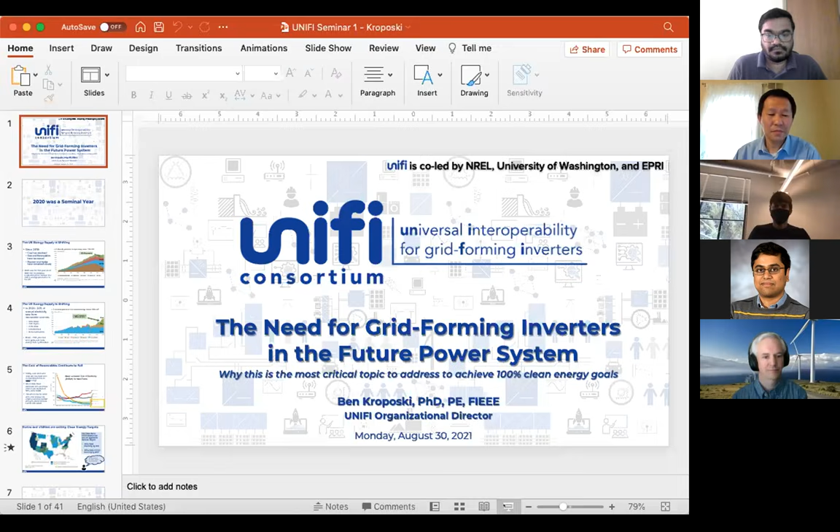My name is Ben Kroposki, and I am serving as the Organizational Director for the Universal Interoperability for Grid Forming Inverters, or as we like to say, UNIFI Consortium. I'm going to be talking today about the need for grid forming inverters in the future power system, and specifically why this is the most critical topic we need to address to achieve 100% clean energy goals.

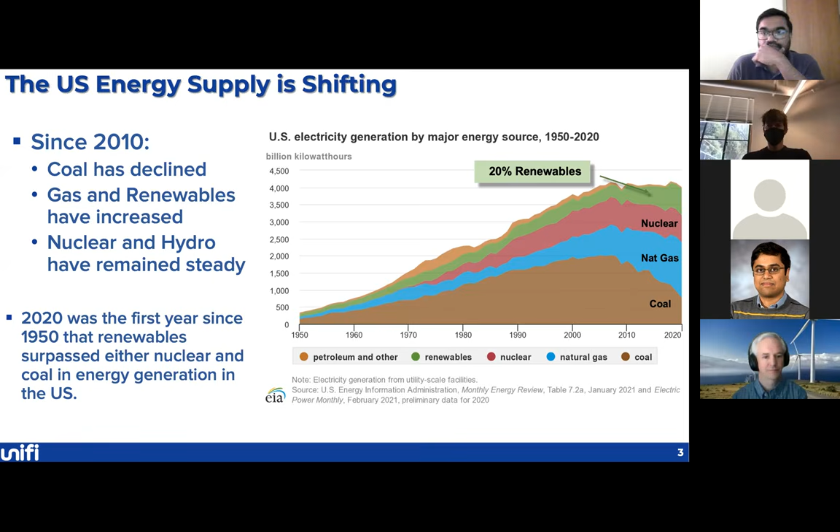So 2020, which was last year, was a seminal year. A lot of important things happened, and let me just touch on some of these critical things. First, the entire supply of energy in the United States is shifting. Over the last decade, we've seen a dramatic decrease in the use of coal, whereas natural gas and renewables have increased and nuclear and hydro have remained steady. But 2020 was the first year, at least on this graph, that renewables surpassed either nuclear or coal in energy generation in the US. So with a 20% energy share, that's a significant achievement where it finally passed coal and nuclear in energy generation.

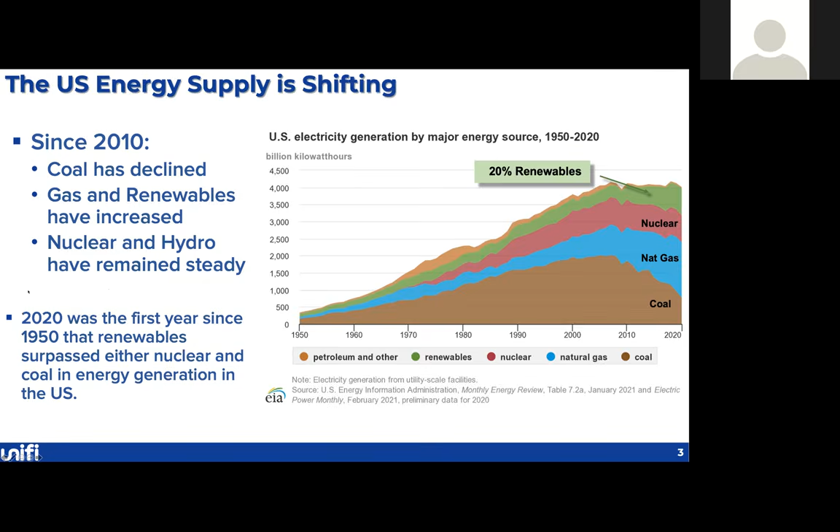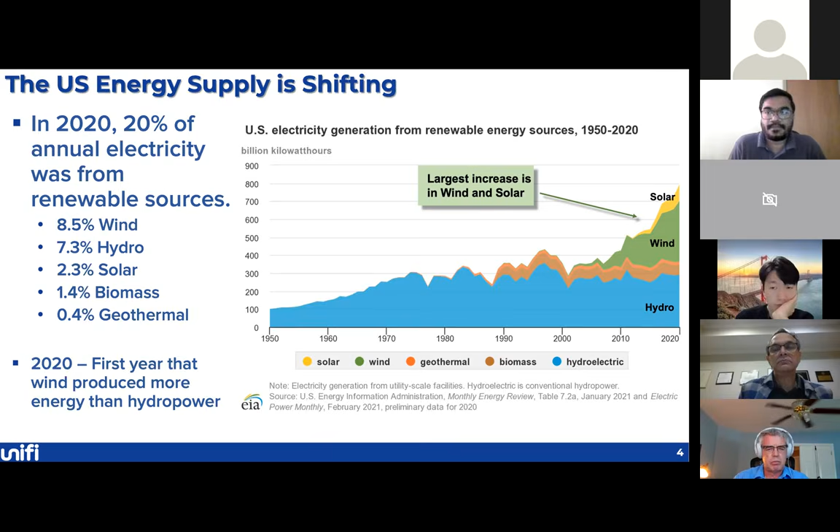So if we take a look at that and we say, why is this really happening, that renewables are starting to take off? We've been working on renewables for 30 plus years, trying to make them cost competitive. But really, finally, if you look down into the 2019, 2020 area, this is when utility scale wind and utility scale solar have become the most cost competitive forms of new energy. Now, this is across the entire United States, and depending on what region you're in, it's going to vary. But in general, we've seen these tremendous decreases, 70% in wind, 90% in solar over the last decade.

And although this is the levelized cost of electricity for new plants, and that's why a lot of new plants going in are either wind, solar, or natural gas, these prices are so low that they are actually rivaling the cost of electricity from existing nuclear and gas plants, and in a lot of cases around the country are below actual operating costs for existing coal plants. This is just a huge change in the industry. And we are going to see this continue for the next decade plus, where wind and solar are going to be increasingly used because they are the lowest cost form of new electricity.

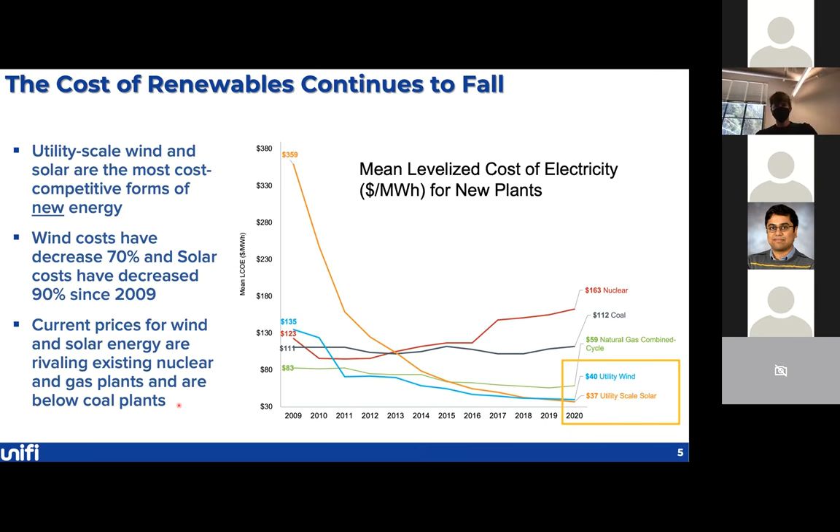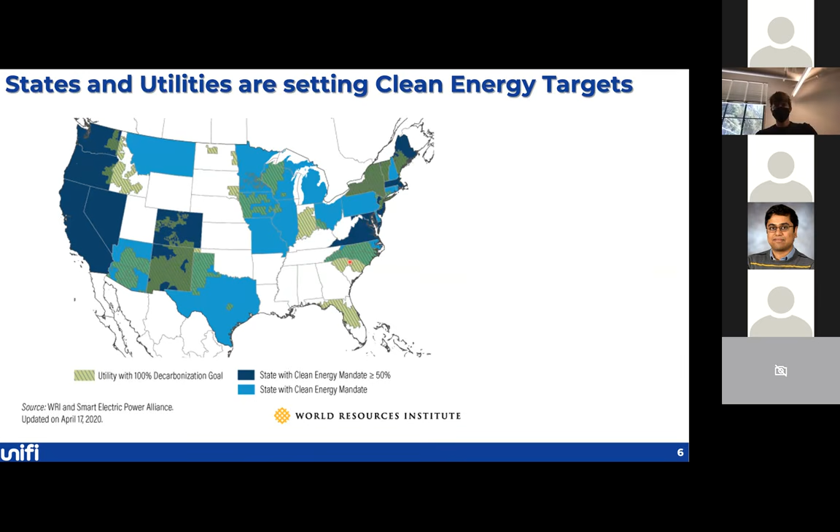So what's really driving this besides the economics? Economics is always going to be the main driver of practically everything that we do, but we're also seeing states and utilities across the United States put together clean energy targets. You can see from this graph quite a number of states that have state clean energy mandates over 50%, several that are 100% clean energy. And these green shaded areas are utility service territories. So you have places like Xcel Energy here in the Midwest, and Duke Energy in the Carolinas, where the individual utilities are setting these 100% decarbonization goals. A combination of these has really led to a push in clean energy technologies.

Now, in addition to that, we have finally seen the new administration come up with these clean energy targets: 100% clean electricity by 2035 and a 100% clean energy economy by 2050. And the engineer in me is sitting there thinking, what do these goals really mean? How aggressive are they?

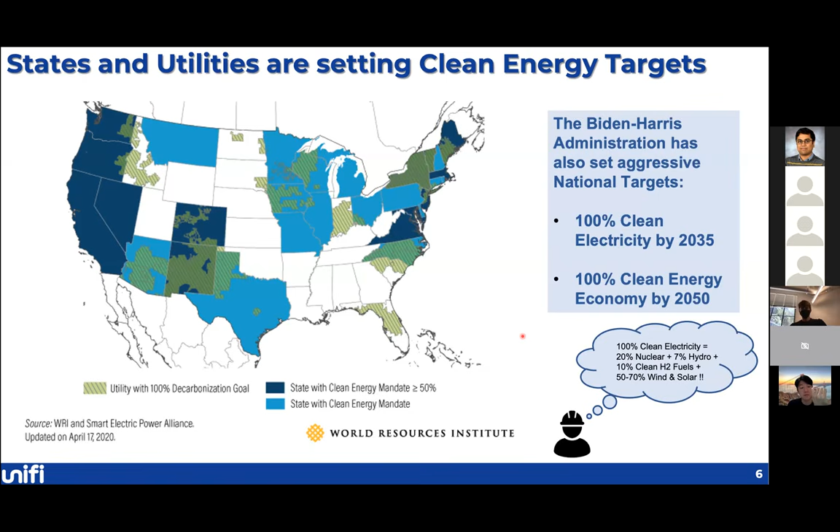If you take a little thought experiment and say 100% clean electricity by 2035, and we have 20% nuclear, 7% hydro, maybe 10% clean hydrogen fuels of some sort in the future, that still leaves 50 to 70% that is going to have to be made up from wind and solar technologies. And this is a really big number. So let's remember that 50 to 70% of the entire system has to be made of wind and solar. So what do we need to do to get there?

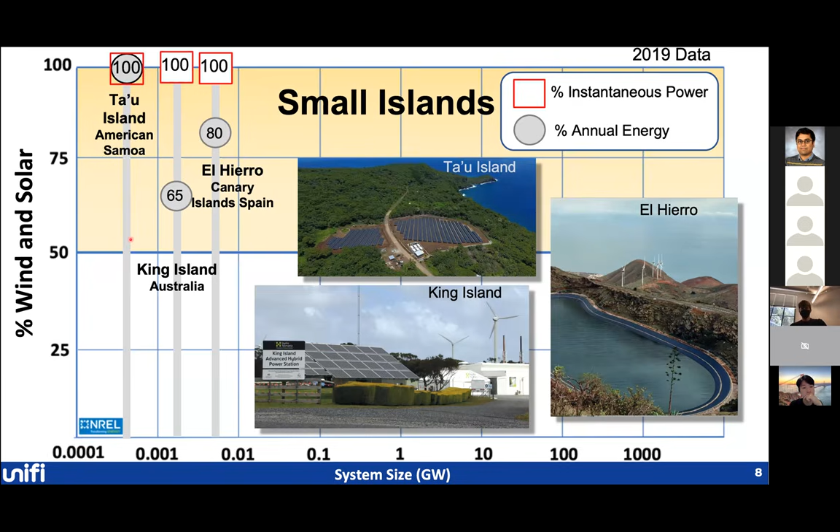As we go to larger scale systems, you can see here on large islands, and here some good examples would be Kauai in the Hawaiian Islands, Maui in Hawaii, Crete in Greece, and the country of Ireland, the entire Irish power system. As you can see here, we get fairly high annual levels, somewhere in the 30 to 40% range, and we're incrementally increasing the instantaneous level of these grid forming sources. You can see 90% to 60%.

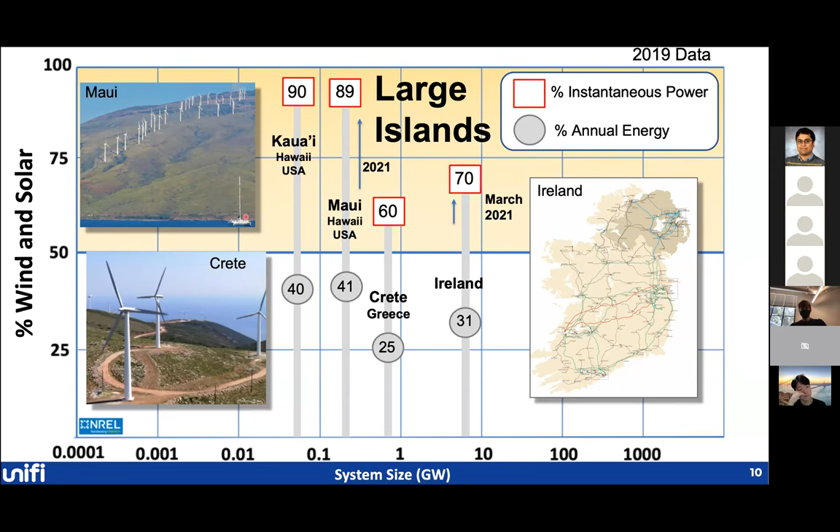In fact, this data is from 2019, and even since then, we've seen increases in these levels. As you can see here, Maui was just, as of this year, able to get up closer to 90%, and Ireland also got up around 70% on an instantaneous level. But you can see we're still, even as we get larger and larger systems, not getting really to 100%. And there's a variety of technical reasons for this that we'll be going through in this presentation.

Now, as we go to larger interconnects, I picked two examples here, ERCOT, which is the Texas power system, and the Western Interconnect of the United States. As you can see here, these levels range from 10 to 26% annually, and then 24 to 58% on an instantaneous level, although this is older data too, and since even this year, ERCOT was up around 66% instantaneously.

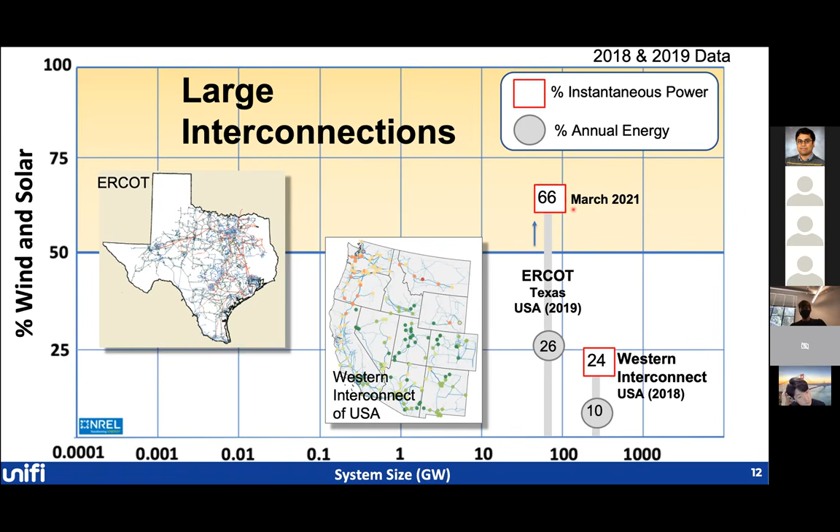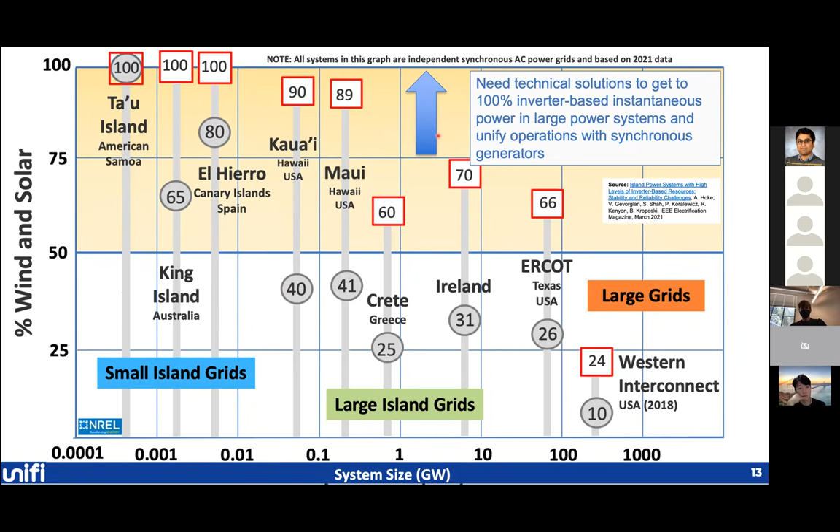But at the end of the day, what we need to be able to do is look at these large-scale systems, figure out the technical constraints, and get them to operate as if they were some of these smaller-scale island power systems. Now, this is a non-trivial problem to solve, but what we want to be able to do is come up with technical solutions to get us to 100% inverter-based on an instantaneous level with really large power systems. And to do this, we need to really unify the operations of inverter-based systems and synchronous generators.

So let's do a quick analysis, just kind of a thought study here, back of the envelope calculation, just to see why getting to 100% is so important.

So let's do a little quick case study. This is using some data from EirGrid, which is the utility operator on the Irish power system. Again, if you look at their 2018 data, which is what we're going to look at, they were up running around 65% instantaneously, which again, this is actually limited by the system operator, which got them to around 30% on an annual energy basis. But by 2030, they want to be getting up to 70% on an annual energy basis

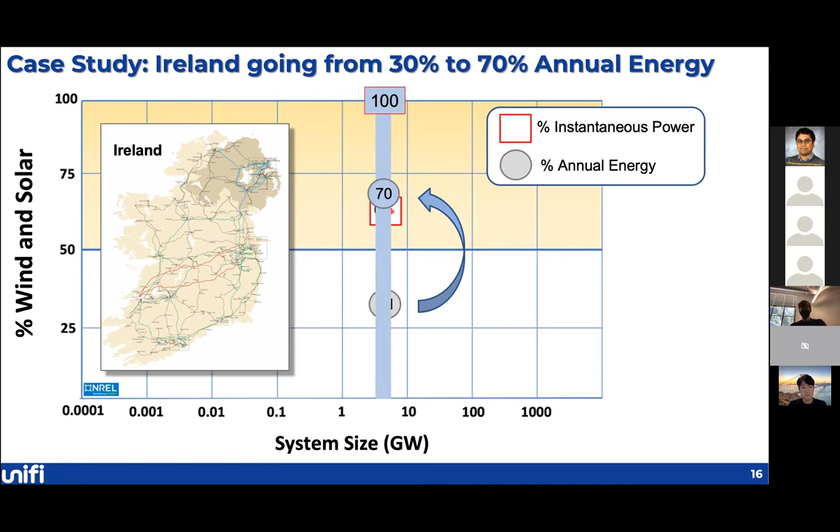and 100% instantaneously. And why 70%? Well, that's on your way to 100% clean energy system. And if you remember from an earlier slide, for the United States, probably up where we need to be in the 2035 time period. So let's just take a quick look at this example to understand why getting to 100% is important. What you see here is the wind data from 2018 in the Irish power system.

And you can see they're limiting this level of wind on the particular system to 65%. This is actually limited by the system operator themselves. But you can see that for the most part, the wind is going up and down crazy throughout the year, going from January to December.

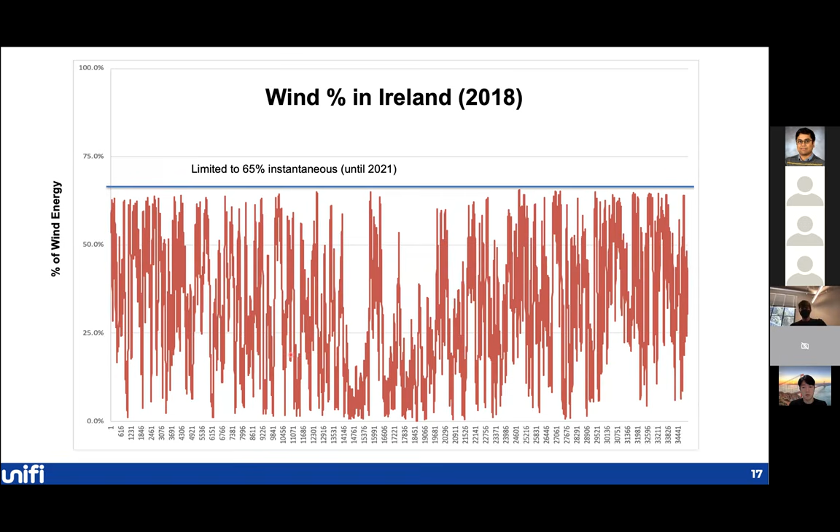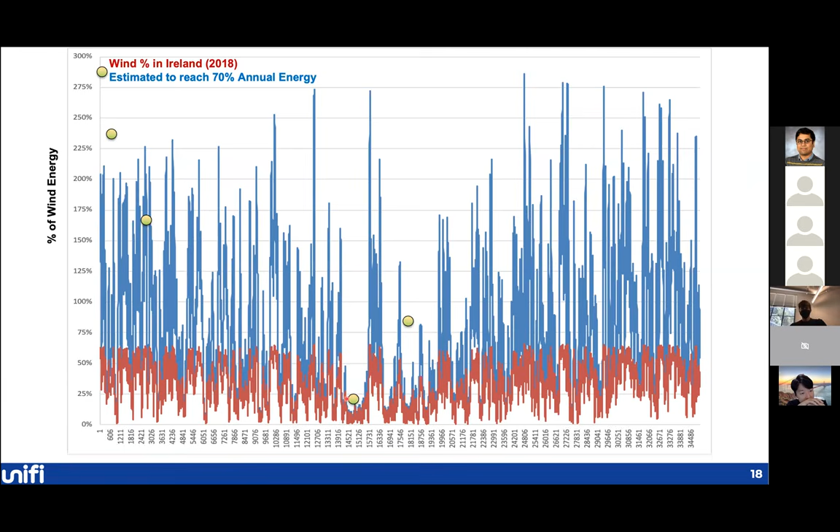Now this graph is pretty crazy to look at, so let's reorganize this data a little bit to make it a little simpler. What we're going to do is create something similar to what especially people in the power system know as a load duration curve, but we're going to create a variable renewable duration curve. So we're going to resort this data from high to low as such. We're going to slowly move all the data around, and then we create this curve, right? We've resorted all these blue data points into this curve, which is called a variable renewable duration curve, but it really quickly helps you understand some important parts of the system.

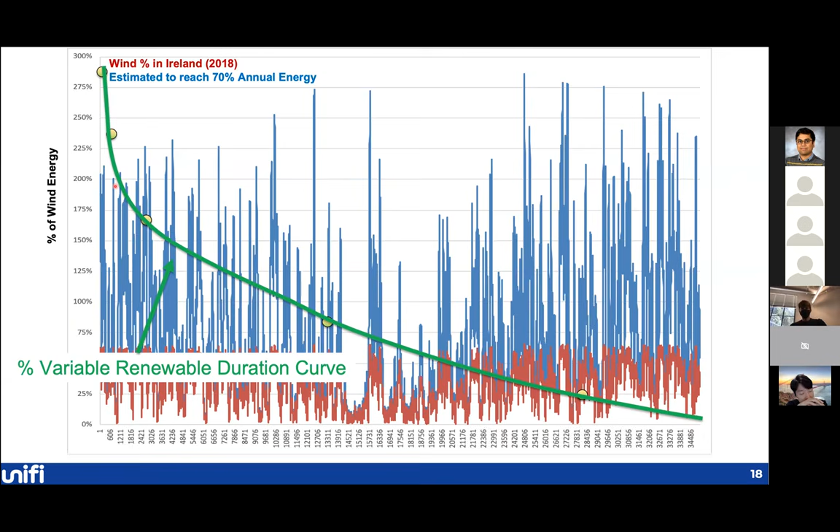So now what I've done is I've transposed that 70% renewable duration curve on here, and then the 30% or 29% duration curve. And if you take a look at this, some important things come across. First off, this amount of energy is provided by wind, which is 30% of the area under this flat line. And the rest of this has got to be provided by other sources, whether it's coal or natural gas or whatever resources you have available. But at the same time, you can't go over 65%. So you're having to basically curtail all of this electricity here.

Now, if all of a sudden we were able to install up to 70% wind, we wouldn't magically get that much energy, because if, for example, we're still limiting the instantaneous level to 65%, we would only pick up this amount of the curve here. And so now instead of 30%, we actually get up to around 45% on an annual basis. And still you need other sources to provide the rest of that energy. And we had to curtail all of this wind here.

Now, if we think about what we really want to be able to do, what we want to be able to do is come up with some type of technical solution to get us to 100%, because all of a sudden that frees up a really big chunk of this annual energy that we're currently curtailing. So if all of a sudden we were able to go to 100%, instead of 45%, we're now up to 58%, and that's getting us a lot closer to this 50 to 70% overall need on the system.

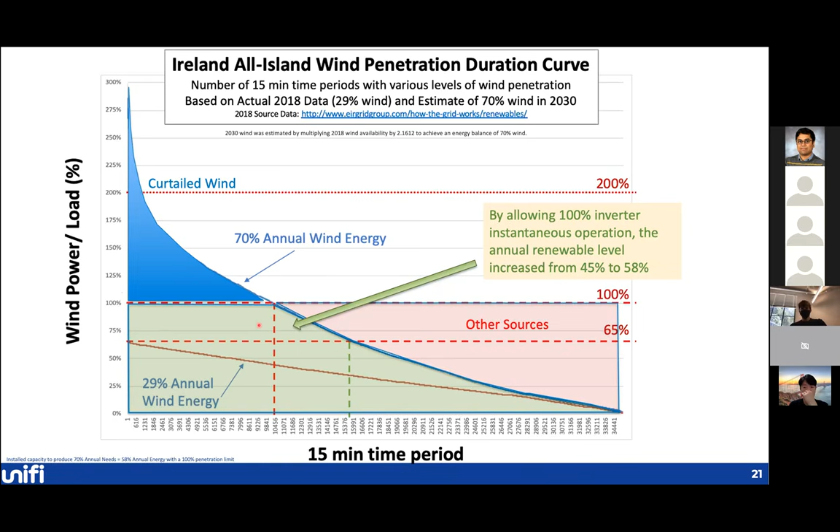Now, of course, I'm just doing it for Ireland here, but if you do this for any particular system, you will get something similar to this, where going to 100% instantaneously will allow you to pick up the most cost-effective portion of electricity. Now you can see we're still curtailing a lot of electricity in this scenario, but at the end of the day, that has to be solved with things like energy storage, increased transmission, or demand response or moving load.

But the biggest and cheapest and quickest way to access the most renewable energy will be through getting this to 100% instantaneous levels of inverter-based resources. And that's really why I'm saying that this is the most critical problem to work on in the short term. Longer term, we're going to have to solve all these additional problems to get and move this excess energy over into this portion here and reduce our dependency on other sources.

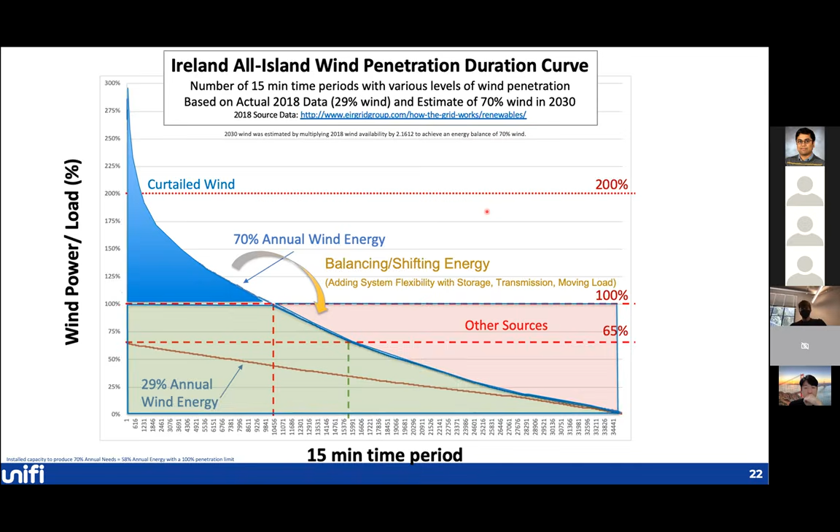Okay, so that kind of explains why we want to try to get to 100% and why that's so critically important. If we take a look at inverters and machines together, let's understand why this is a challenge and what we need to address. So if we take a look at currently operating large-scale power systems, for the most part, they're based on synchronous generator technology. So whether it's hydropower, coal, nuclear, natural gas, all of these have a synchronous generator inside of them.

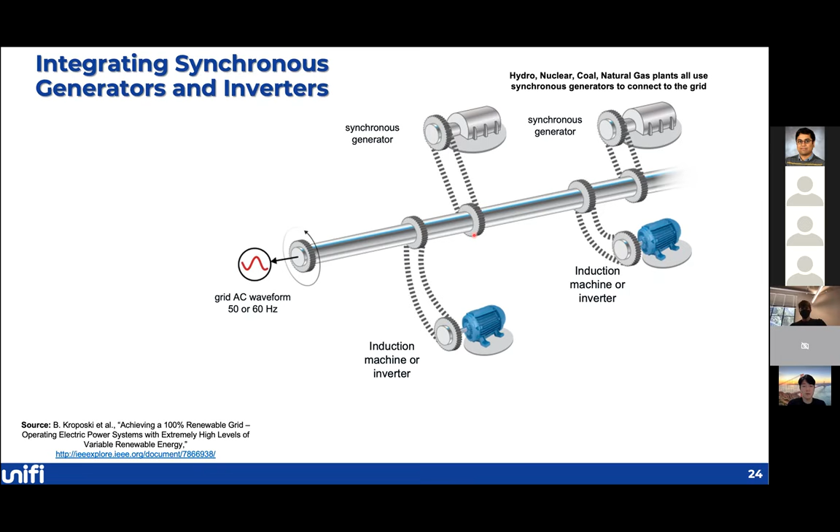And when we electrically connect them together, so you can imagine this being a transmission line connecting two generators together, we create a large virtual power machine that is all synchronized together and outputting an AC waveform, whether that's at 50 hertz like in Europe or 60 hertz in the United States. When you connect induction machines or inverter-based technology, they don't necessarily have a physical connection that is created by these synchronous generators. So you have a somewhat looser connection, if you will.

But what we need to do in the future is, as we develop PV and wind technologies and inverters, that they sort of replicate what's going on in synchronous generators, although they don't have all the physical characteristics. But if we can come up with sort of rules of the road on how to unify the operations of synchronous generators and other synchronous machines and inverter-based resources at any scale, that will enable us to either run at 100% inverters, 100% synchronous generators, or everywhere in between, which is what we're going to need in future power systems with wind and solar resources varying throughout the day.

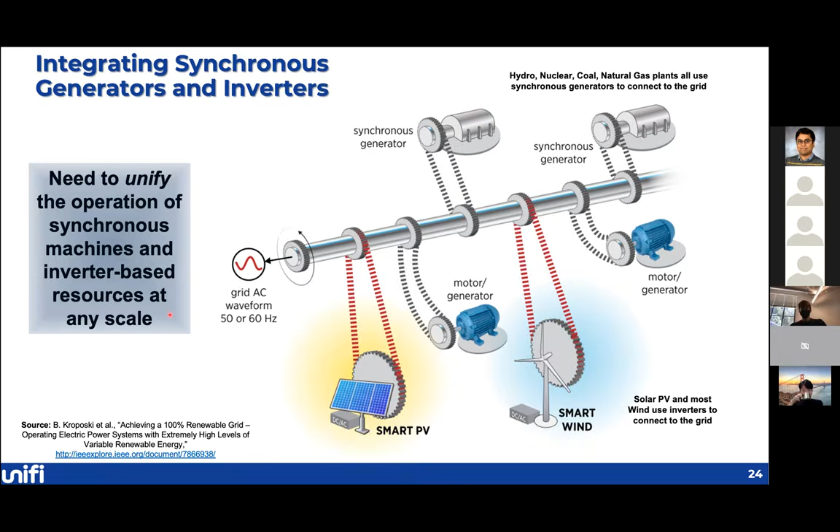There are a variety of technical challenges with inverter-based technologies, and this particular consortium is going to focus on trying to address a lot of these. I'll highlight them here, even though I won't go into massive amounts of detail. We'll be doing those in future parts of this seminar series. But if you think about the system, we always need to be able to maintain frequency stability and voltage stability. So those will be critical aspects.

Now, we can do that actually currently with grid following inverter technology by adjusting the control algorithms in there to have what we call fast frequency response characteristics that would emulate some of the inertial characteristics you would see in synchronous generators. But there's additional considerations that need to be taken into account. Things like system protection. So I often use this graph as a way to just quickly understand why system protection is so important and what inverters bring into a system and why it's a challenge.

If you take a look at this graph here, what we're assuming is that a fault happens on this system at basically time 0. And when a fault happens on a grid with a synchronous generator, you get some output characteristic of the current that looks like this. So it's maybe 6 times rated output current for several cycles as it decays. But this huge spike in current very quickly allows protective relaying devices or fuses to recognize a fault has occurred and operate properly in order to isolate that part of the system.

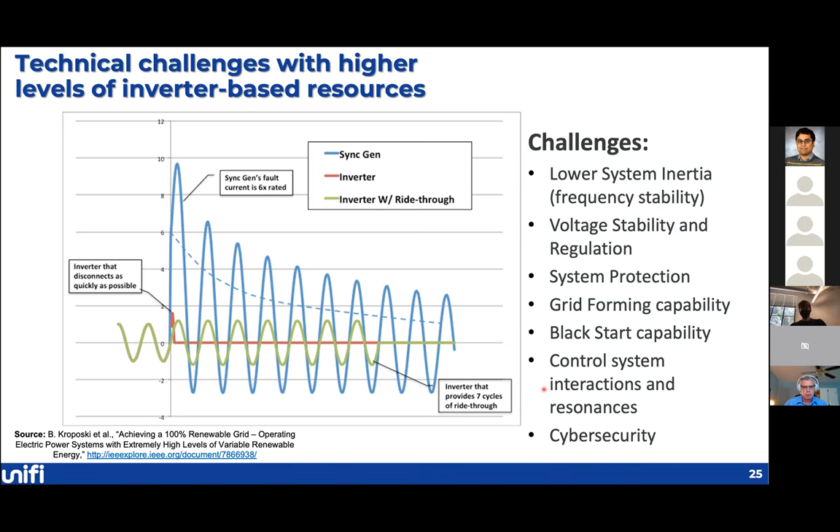There's additional issues around the various control systems that get implemented in inverters and potentially interactions with those, as well as cybersecurity concerns when you have so many distributed technology devices. Let me just real quickly go back to this black start capability because I wanted to highlight an example of grid forming technologies. This is actually an example of not even a project.

This was actually a necessity that we had at NREL, where we were able to run our building loads on a large PV plant plus a wind turbine plus a battery. For over 72 hours, we provided these building loads in this 100% wind PV battery grid during a site outage that we had at our Flatirons campus. But we were able to actually connect all of these together and operate this type of system, and we're able to demonstrate black start capabilities.

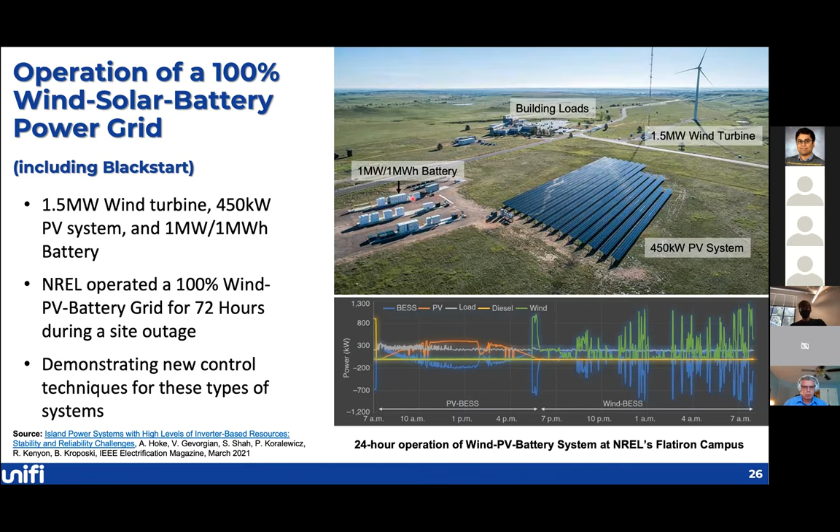But even though we were able to demonstrate this, one of the things that we would like to eventually do is have all the inverters that were associated with these different components actually all be independently grid forming and compatible with each other. In this particular case, we were able to run this system because we had one device, the battery system, that acted as the grid forming and grid reference signal in the system.

So I've explained a little bit about what's going on in the power system industry currently right now with renewables. I've explained what we know about how to operate grids. And I've explained why getting to 100% inverter-based grids is critically important. But let's talk about what we really are starting here, which is the UNIFI Consortium, a way of bringing the industry together to solve all of these challenges and enable these types of systems.

So our vision for the future is the future power systems that have any mix of machines and inverter-based resources at any scale that enable this affordable, secure, reliable, clean, and resilient power grid. If you take a look over here, you can see a recreation of those graphs I was showing you earlier. But what we need to be able to do is address these fundamental challenges that are limiting these types of large-scale grids for getting to a near 100% system.

And basically create a way to seamlessly integrate grid-forming technologies with the power system of the future and get these systems operating at close to 100% instantaneously, which will enable the annual averages in terms of renewable technologies to get above 50%. So inside the UNIFI Consortium, we plan to conduct research and development, demonstrate these grid forming concepts at scale, develop best practices and standards, and train the next generation workforce for how the future power grid will operate.

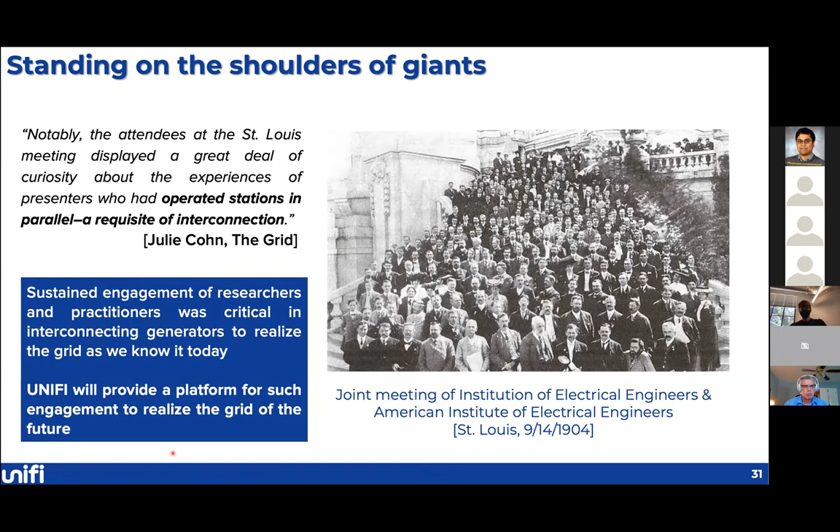This interoperability between all the synchronous generators really led to the interconnections that we know today and that operate and provide power across the United States and around the world. And it's really the sustained engagement of researchers and practitioners. It was super critical for how we can interconnect generators to realize this future power grid. And UNIFI is going to provide this platform for engagement to realize the grid of the future, where we're integrating inverter-based resources and synchronous generators completely together.

So what do we plan to do inside this consortium? If we think about it, we're going to unify the old technology, the synchronous machines, and the new technologies with grid-forming and grid-following inverters. We're going to unify local controls and global controls across the system. We need to unify how these things operate at both slow and fast timescales to be compatible with each other.

We also need to unify how large-scale inverters and aggregations of these technologies integrate with much smaller ones, because inverters are unique. They can be all the way from 200 watts up to several megawatts. And finally, we're going to unify how solar, wind, and storage technologies integrate with the electric power system to create this clean grid of the future.

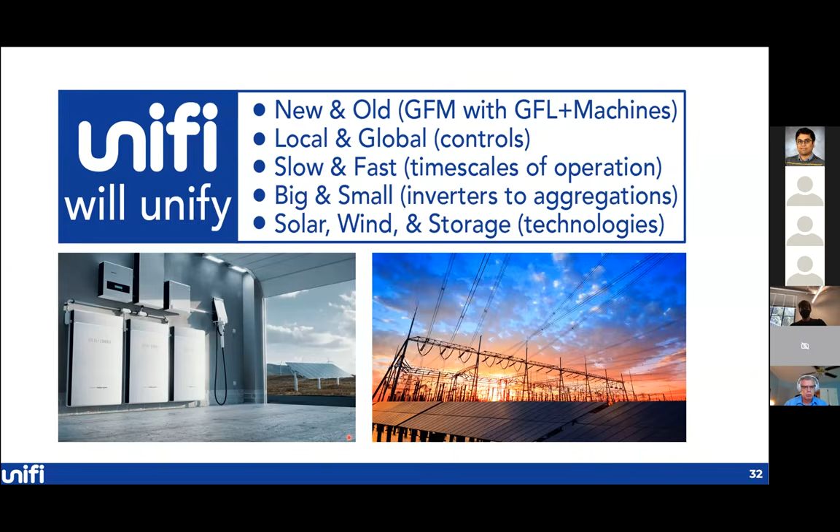In addition to the project partners, which are partners that are either receiving DOE funds or contributing cost share, we have an additional set of industry partners that we're reaching out to across the entire scope. So additional utilities, additional vendors, additional software providers and system operators, as well as other consortia that are in this space in power systems or in power electronics. But we are looking at a kind of connection between the power system world and the power electronic world in a way that allows for this entire grid to operate smoothly.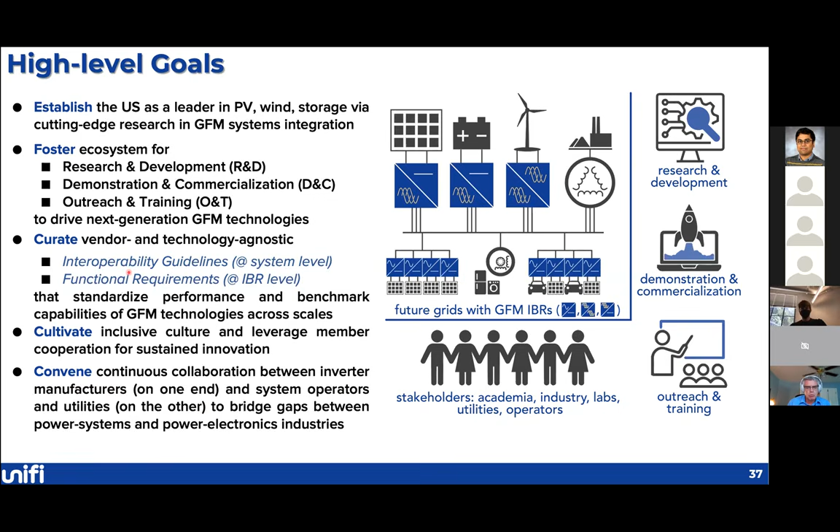So let me talk a little bit about these interoperability guidelines and functional requirements, because this is the key piece of this consortium that will be developed over the next several years. Even this year, we'll start at this, and then through research, demonstration, and collaboration, we'll be able to eventually translate a lot of these breakthroughs into more standardized products and standards.

So if we take a look at interoperability guidelines, what we really are focused on there is how do we promote the coordination and seamless operation of many different grid forming technologies from multiple vendors while ensuring stability and reliability. So this is the key thing here. From a systems level perspective, they just want all of these different technologies to connect, make sure the system is stable and reliable, but from many, many different vendors that are going to be providing inverter-based technologies.

So we'll be looking at how do you develop scalable secondary controls, how do you maintain system level stability, how do you look at voltage and frequency regulation, black start capabilities, and ensure cyber secure communications across these areas. When you go down to the functional requirements from individual grid forming plants or individual inverters themselves, how do we make sure that we're specifying how these requirements operate so that they are developed in a vendor agnostic fashion and satisfy all the system level requirements coming from the top level system?

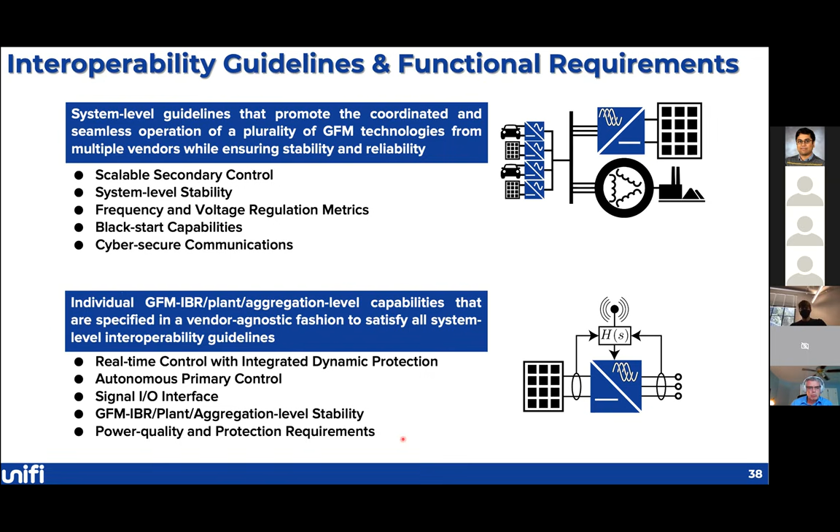And inside there, you're talking about real-time control with dynamic protection, autonomous primary control signals. How do you manage the input and output from communication signals? How do you look at aggregations to maintain stability, and what type of power quality and protection requirements are needed? So this is really the heart of the consortium itself. And to develop this, we're going to need the entire industry to get on board and move this forward.

So just to start wrapping this up, as you saw here, our UNIFI consortium is starting off with 4 national labs, 12 universities, 6 inverter manufacturers, 8 utilities, 2 system operators, and 3 real-time simulation and software vendors. But the reality is we are trying to get the entire industry connected to this project. So we have over 80 letters of support on this particular project, and we'll be reaching out to many more parts of the industry as we move this forward.

This particular group of people did the initial development around droop control and virtual oscillator control that you may have heard so much about if you're in this grid forming space. We've got lots of experience doing large demonstrations of inverter-based resources providing grid services. The team has extensive experience in the standards organizations and leadership roles in IEEE 1547 and the new P2800 standards. And we've really tried to put together a broad coalition of the world-renowned experts in this space.

The key goal here is to unify the integration of machine and inverter technologies. As we've seen in the past, interoperability drove the interconnections that we have today, and interoperability will drive the innovation of the grid of the future. And we think that UNIFI can be a key driving force in the U.S. power sector and renewable energy industries to achieve 100% clean power by 2035.

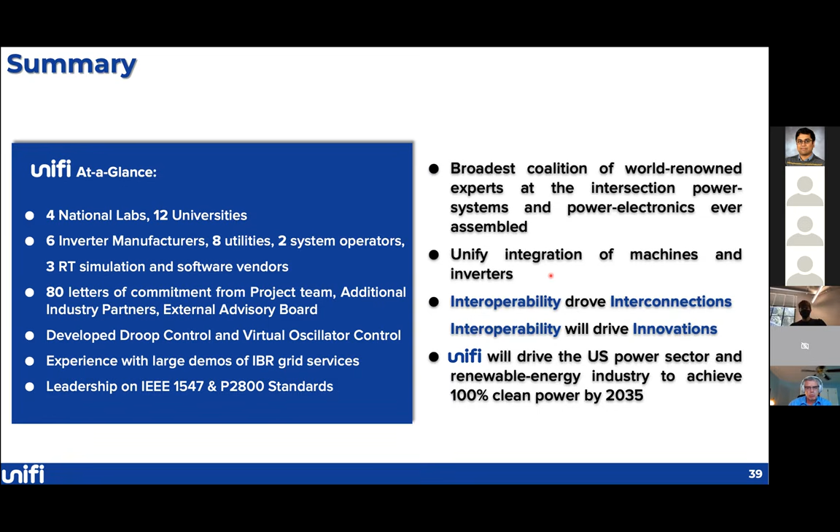So our first step in this entire journey has been with you here today. We've just kicked off our seminar series. More information will be coming out about all the follow-on talks in this series, and then we plan on continuing this past the fall into next year and beyond as a way to get people to talk about grid forming technologies and learn from each other in this space.